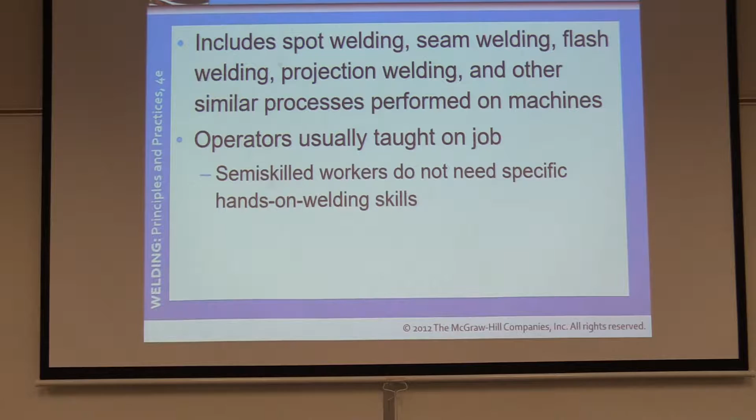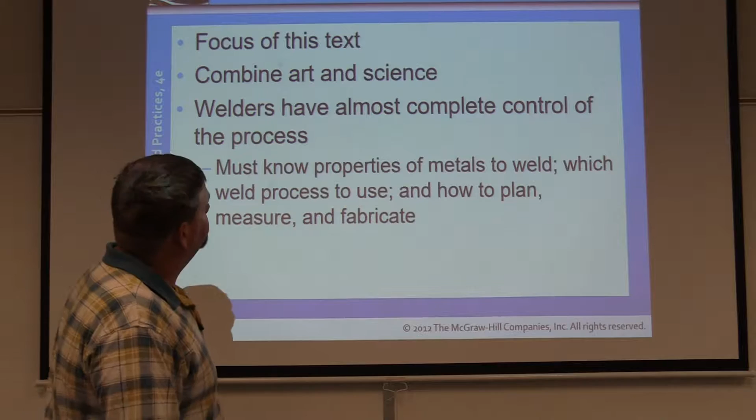Alright, so now we're going to do the combination of art and science. Welders have almost complete control of the process. Welding is very much an artistic skill. However, it also has a tremendous amount of science, chemistry, electrical theory, metallurgy. There's so much that goes into welding, machining, and so forth, that as we dig deeper and deeper underneath the surface, it gets really fascinating for most people to start thinking about how we weld and join materials together.

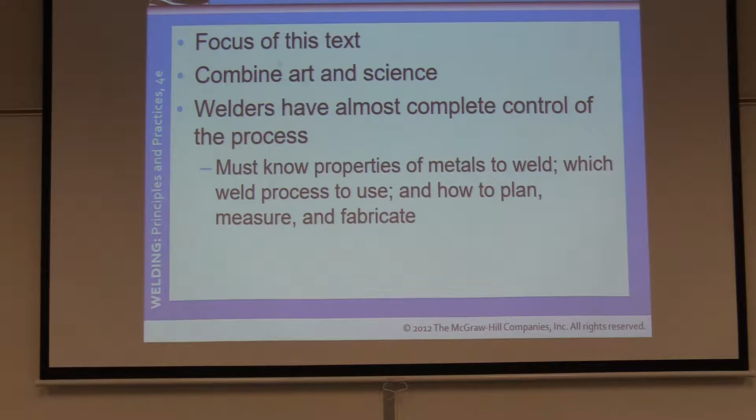Alright, so now we're back to the book. Chapter 1, page 8, left-hand column, two-thirds of the way down. It said gas welders may specialize in oxyacetylene.

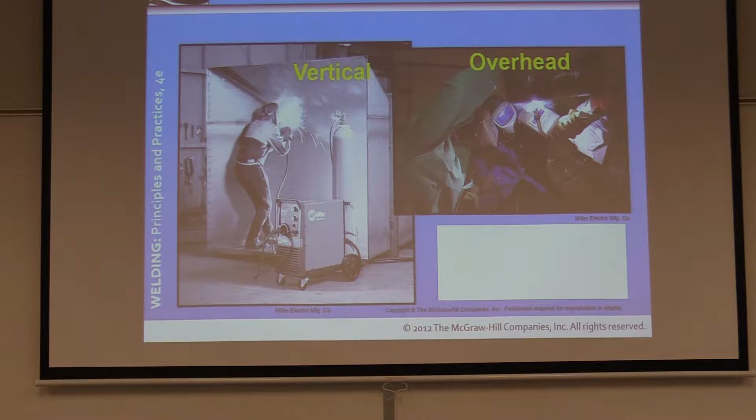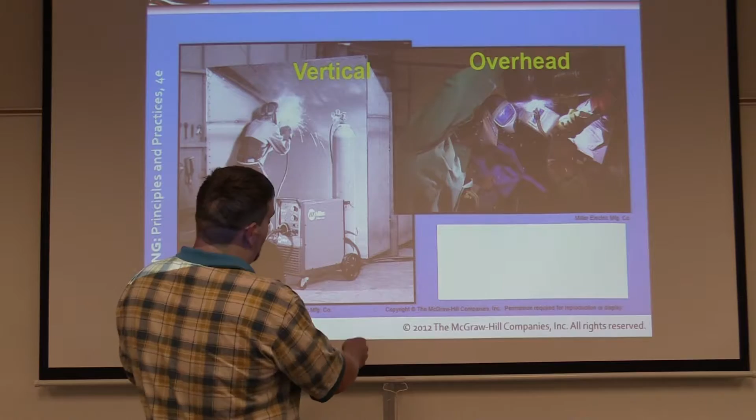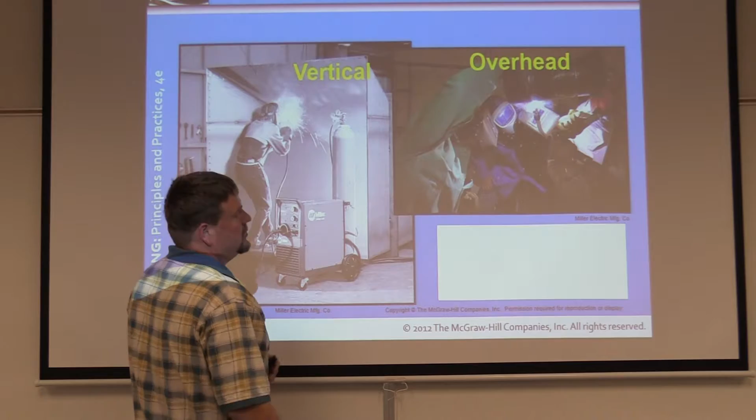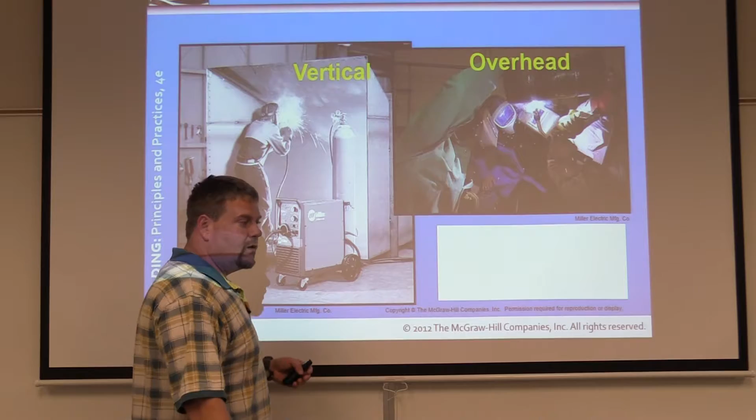Back up here, I'll show you a couple of examples. Let's look at some different ones. You can see the vertical weld this gentleman is doing. This is kind of a 6G position, so it's at a 45. However, vertical weld is where the progression of the weld is going uphill. Now you can have a vertical weld with an uphill progression, or a vertical weld with a downhill progression. That's what we call an essential variable. Certain welding rods are designed so, for example, 7018 is designed to only weld uphill. 6010, which we'll also be using, especially in 5G, is designed to weld uphill or downhill, either or. Part of that has to do with the flux capacity and so forth.

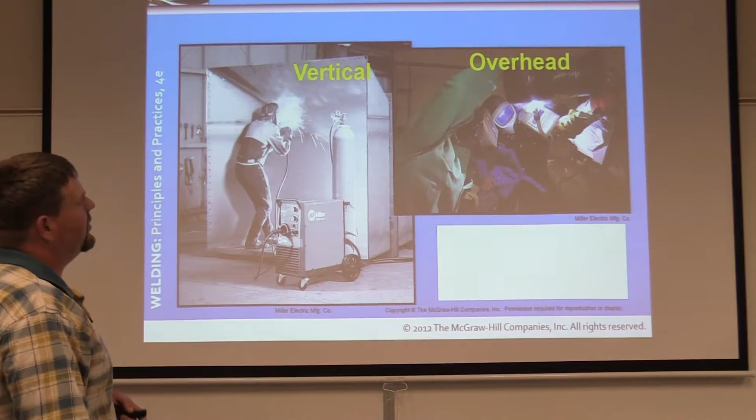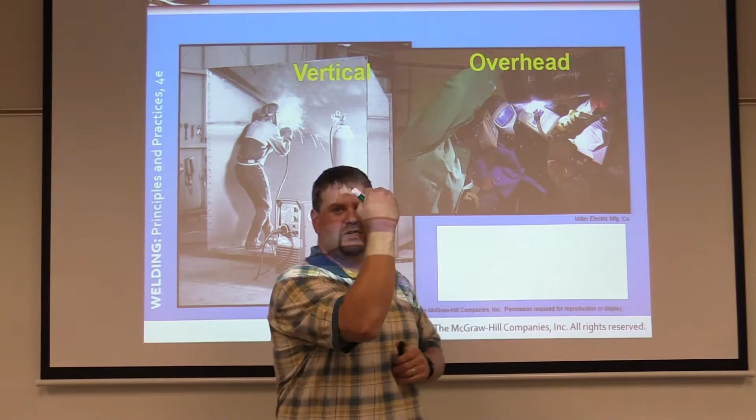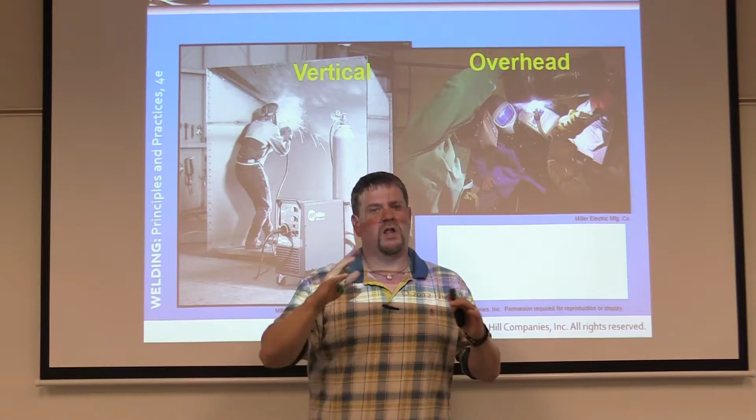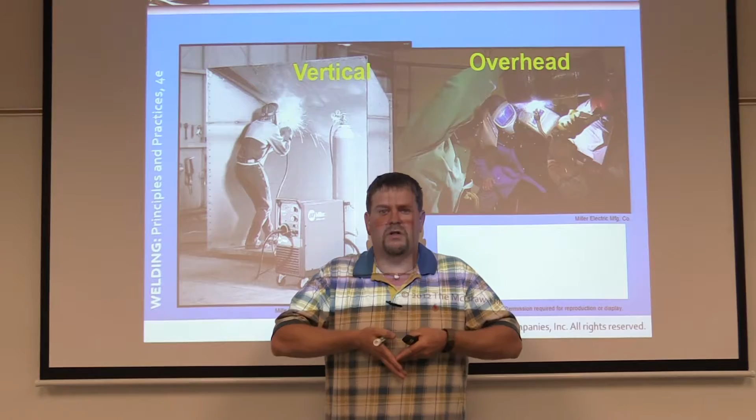In this picture here, the overhead weld, as you can see, he's welding literally overhead. Now let's be very careful. Overhead welding means that weld is in that position. Does it have to be above your head? Not necessarily. If that weld is two inches off the ground or two miles in the air, it's still an overhead weld. The only thing it has to do is be in the same position that's classified an overhead weld. Same thing with flat. If a flat weld is two inches off the ground or two miles in the air, it's still a flat weld. It's a welding position. It doesn't have any correlation to where it is in comparison to your body.

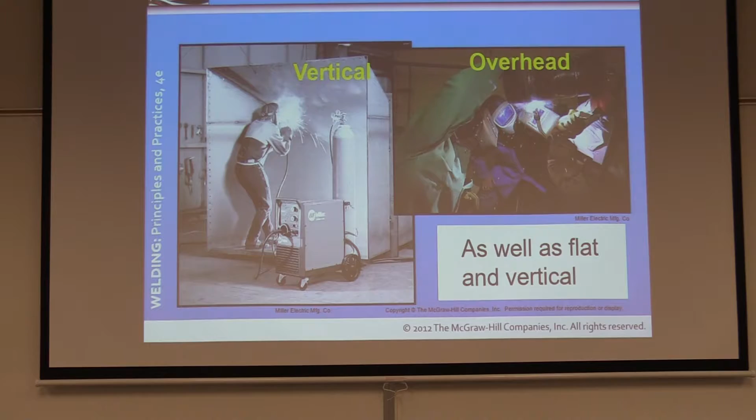We talked about certification and so forth. Let's get into gas welding, okay?

Gas welders, so we're back to the book, page 8, left-hand column, halfway down. Gas welders may specialize in oxyacetylene or gas tungsten arc welding processes. Some welders are skilled in all the processes. You should acquire competence in shielded metal arc welding, SMAW, GTAW, and GMAW processes for both plate and pipe.

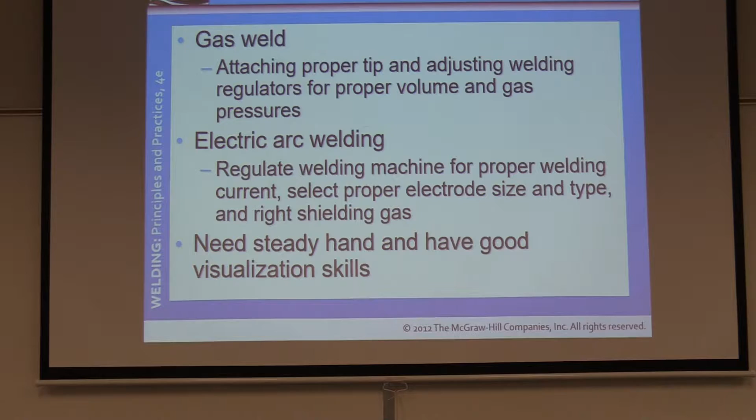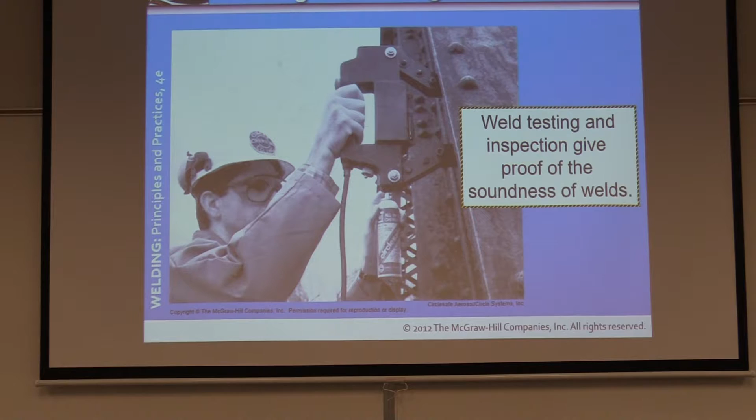Real quick, go to the bottom of that page, left-hand column, qualifications of personnel. Read through that paragraph and the paragraph to the right as well. They talk a little bit more about what I was explaining with qualification versus certification and so forth.

Page 9, left-hand column, bottom paragraph. Welders must also be able to cut metals with the oxyacetylene cutting torch and with the various cutting...

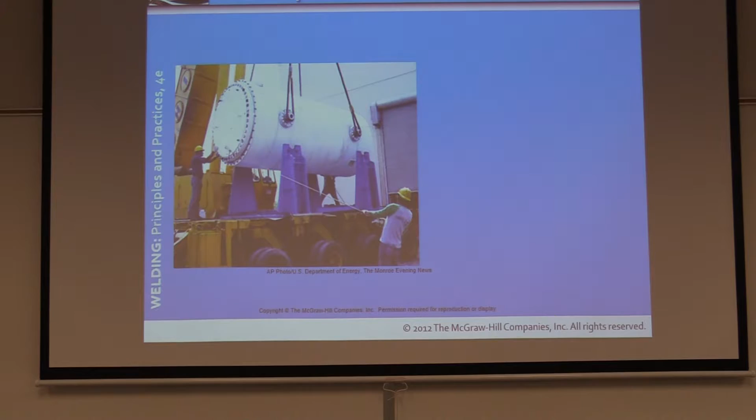Let me find this real quick. No, okay, it's not in here, so back to the book.

Welders must be able to cut metals with the oxyacetylene cutting torch and with the various cutting procedures involving the plasma arc cutting machine. Flame cutting is often the only practical method for cutting parts or repairing steel plate and pipe. Plasma arc cutting is used to cut all types of metals. Proper use of an electric or pneumatic grinder will save many hours in the welding processes.

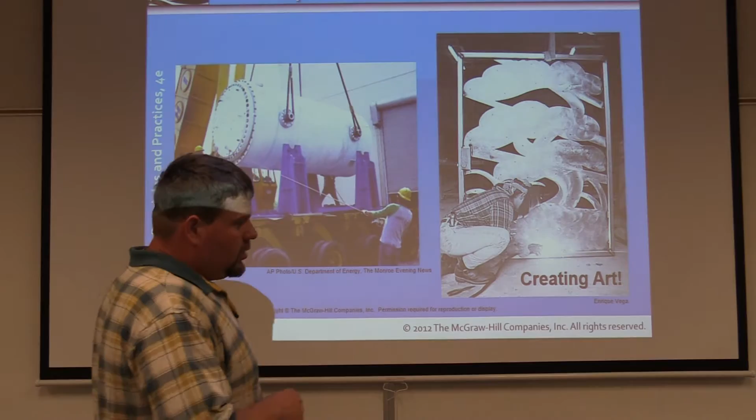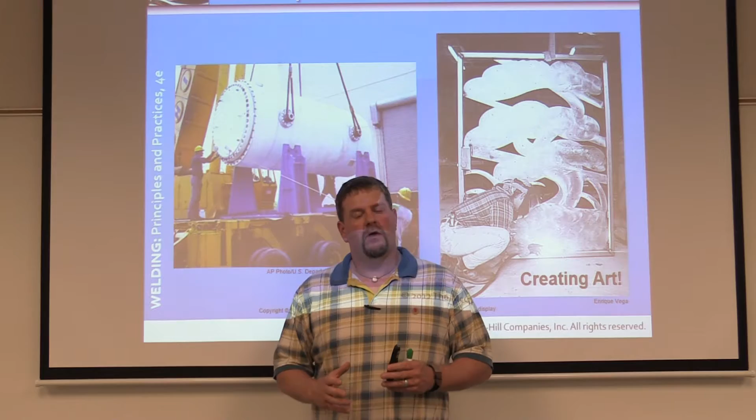So, talk about this here in a minute. A lot of times folks will come into our shop and they only want to use the plasma arc cutting because it's faster, it's cleaner, it's not as hot. You can turn it on and cut something real quick. That's not what we're here for. We're here to get experience in both. The majority of the time, I want you, if it's steel, to cut it with the oxyacetylene cutting practice.

An oxyacetylene cutting torch is in almost every shop across the country and across the world. It's the most inexpensive and easiest cutting method out there. The tips last years and they're inexpensive. For example, a cutting tip might be $15 for an oxyacetylene torch. There's cleaning tips you can use to keep it clean and well maintained, so forth. You might get 3 or 4 years out of that cutting tip.

A plasma arc one, the electrode itself is like $25. By the time you add the consumables up, you're $60, $70 into just the consumables, let alone you also need an air compressor or another fuel or gas. You can use other gases like helium and argon. But you also need a high electric charge or plasma, or an electrical outlet to run the plasma machine. If you're out in the middle of nowhere, you don't have an air compressor and you don't have 220 volts, and you don't have a small machine to run on 115 volts, so there are a whole lot of variables there you may not be able to use.

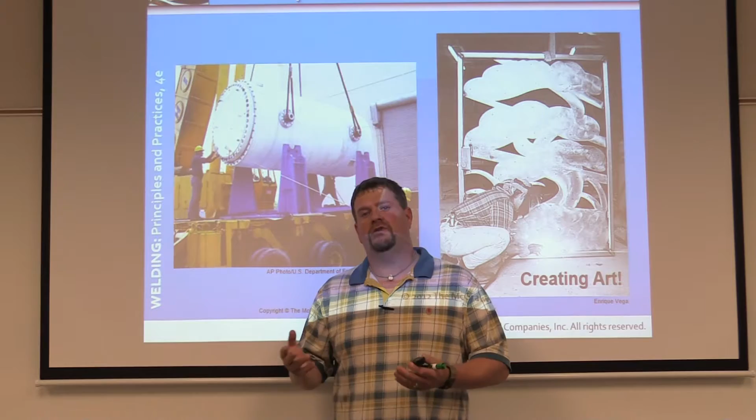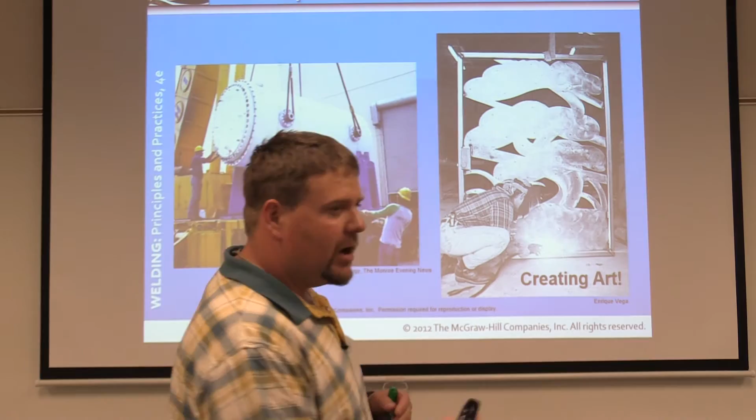However, if you've got an oxyacetylene torch, you can cut almost anything. Steel - I'll explain to you later during the oxyacetylene class how you can actually cut stainless steel by oxy fuel as well, using a waster plate and using the carbon to help accelerate the process. That's a topic for another day. So you're going to be using the oxyacetylene welding cutting torch a lot, along with the plasma arc torch as well.

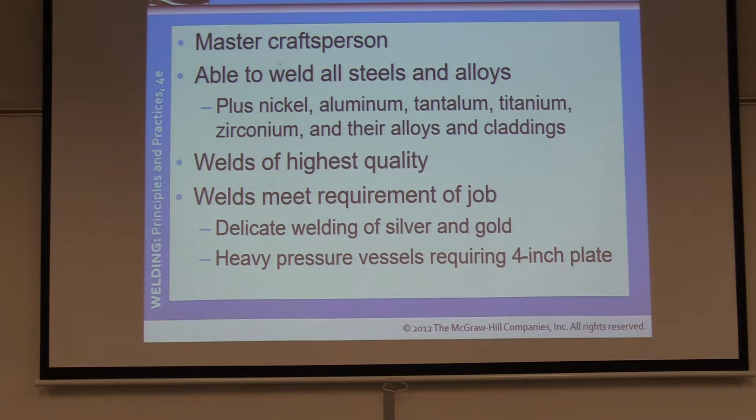Okay, so let's just hit the PowerPoint here. I don't see it coming out of the book really. There are some other parts of this chapter that are very important. I don't have anything in my book highlighted, but let's talk about a few things in the rest of these slides.

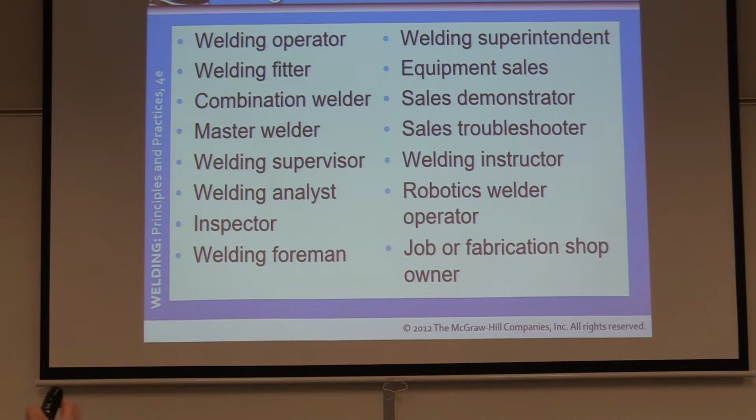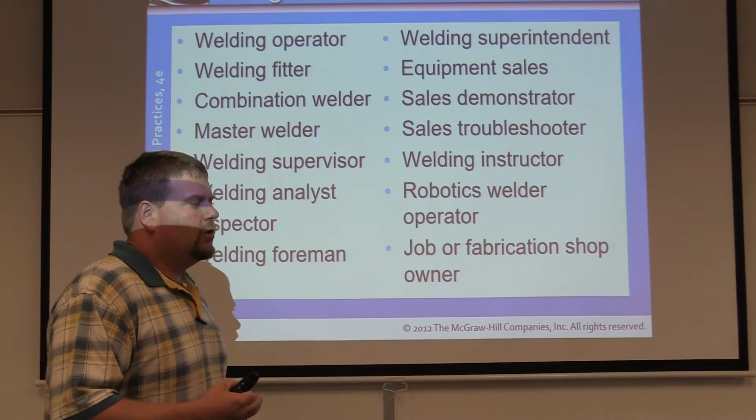Okay, welding occupations requiring a high school education? For the most part, yes, nowadays they do. However, it doesn't necessarily mean that's the only way you're going to get a job. Again, it goes back to the certified welder. Are you going to get a job only if you're a certified welder? Absolutely not. Some companies do not require you to be a certified welder.

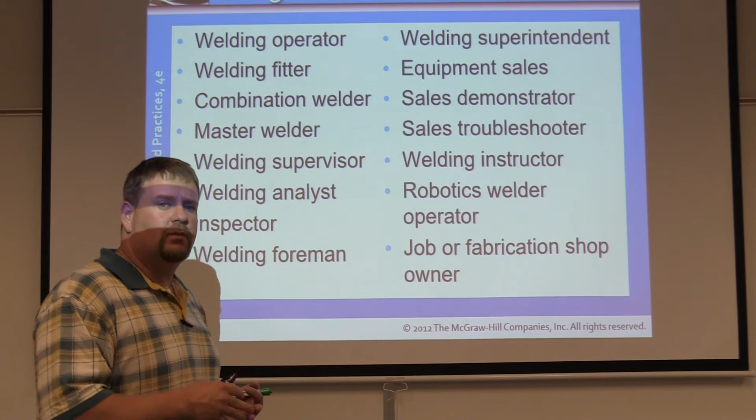Some of them may. Usually, if you are a certified welder, it produces higher paying jobs, but it also puts some more pressure on you, because if you get 3 rejectable welds within a 6-month period, you might be fired. So anytime you get higher wages, it comes with higher responsibility and a higher skill set as well.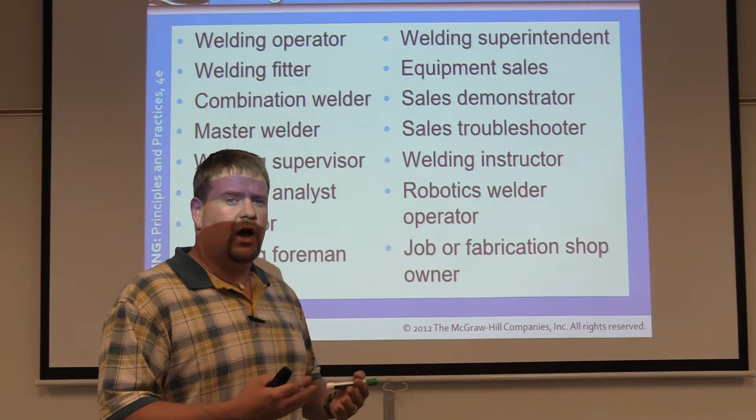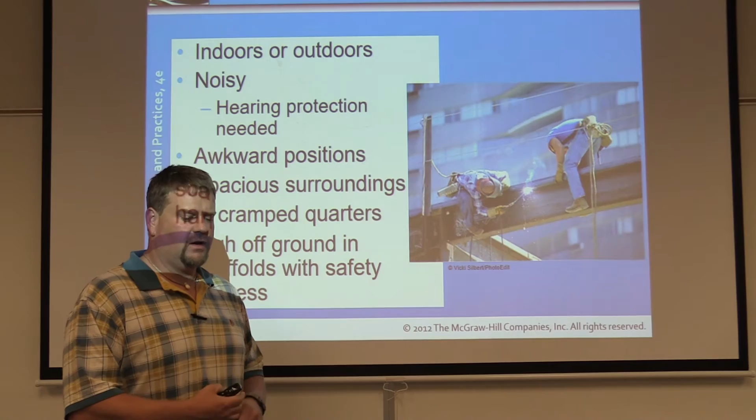Safety and working conditions. By this point, we've been through MATC and the base welding safety class within the manufacturing program. However, safety doesn't stop there. Safety's every day, every day.

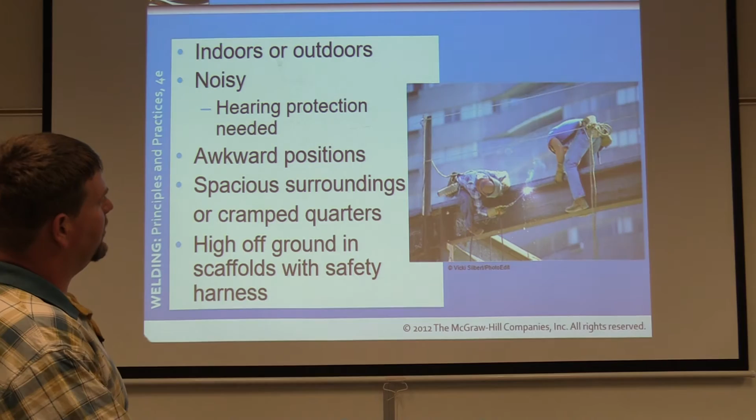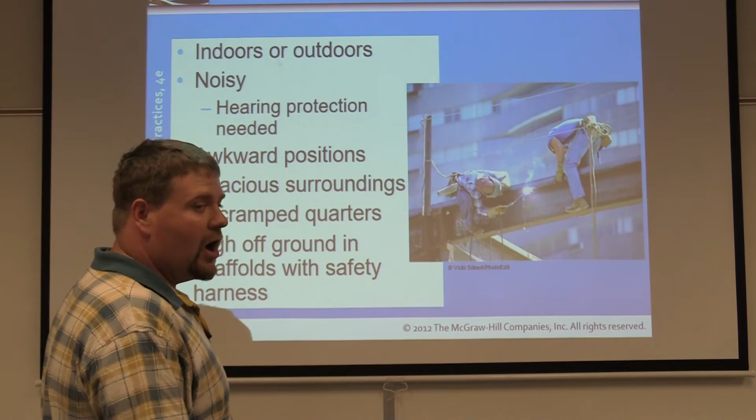Always be thinking, and here's a good example in this picture. These folks are up here on this beam hanging off there, tied off. Things have changed a lot because it looks like they're only wearing waist belts. Now it would be a full body harness, so forth. But there's possibility of falling, you're outside, and it's either hot or cold - one of the two usually. You're in the sun exposure all day, you're wearing heavy clothing even when it's warm out just to keep from getting burnt, and you're in awkward positions, so forth.

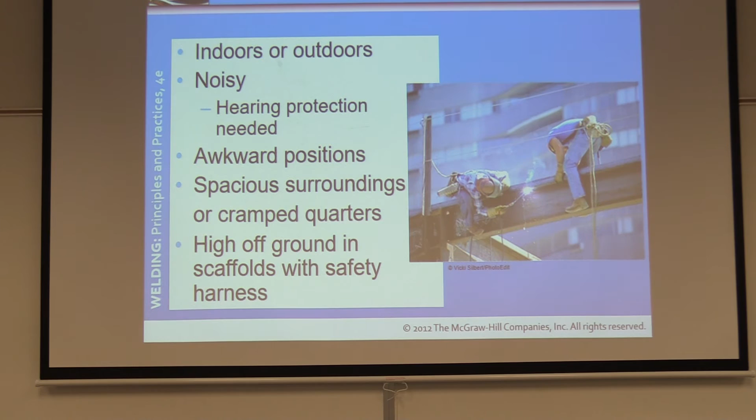We've talked quite a bit about it. Please remember to just keep all these topics in mind as you're going through.

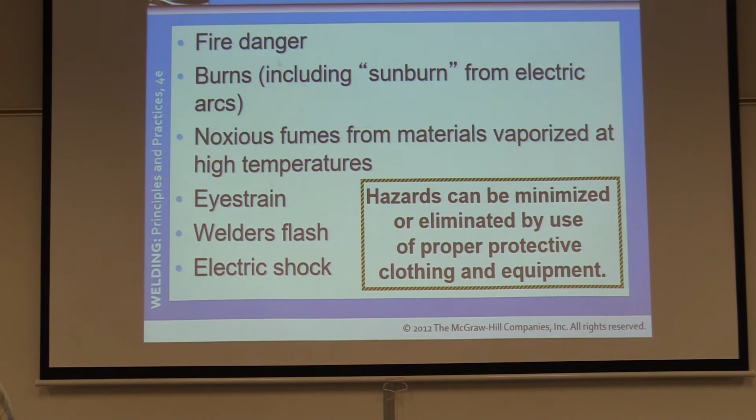Okay, so at this point I would do the Chapter 1 review out of the back of your book. Some of the questions out of your chapter review may be on the test, some of them may not.